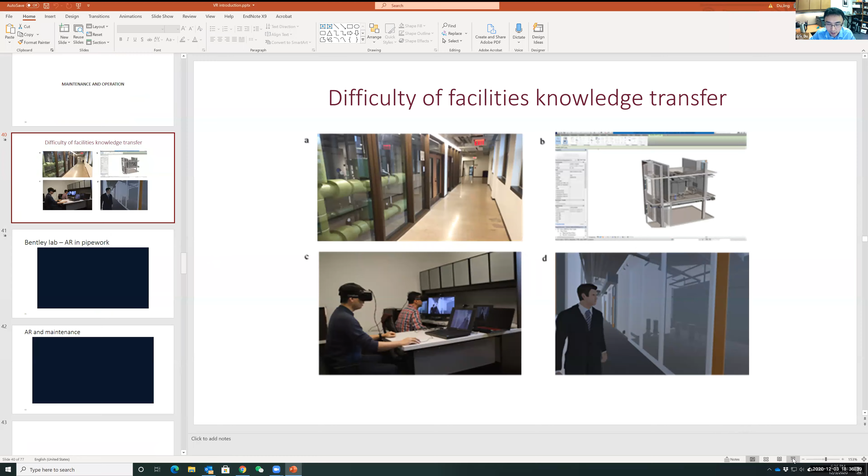Facility management is another promising use of VR and especially AR. I'm going to play a quick video by Bentley about a project they had several years ago, showing how HoloLens AR goggles can help identify issues with a pipeline system and fix the problem. You will see multiple functions in this project.

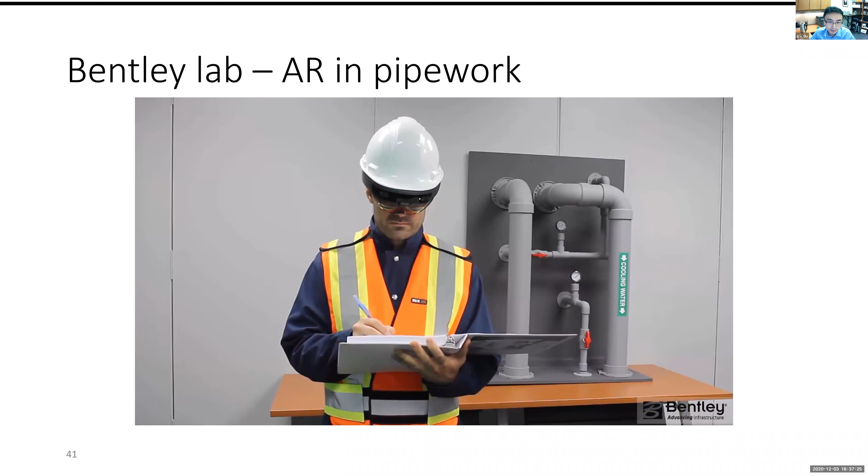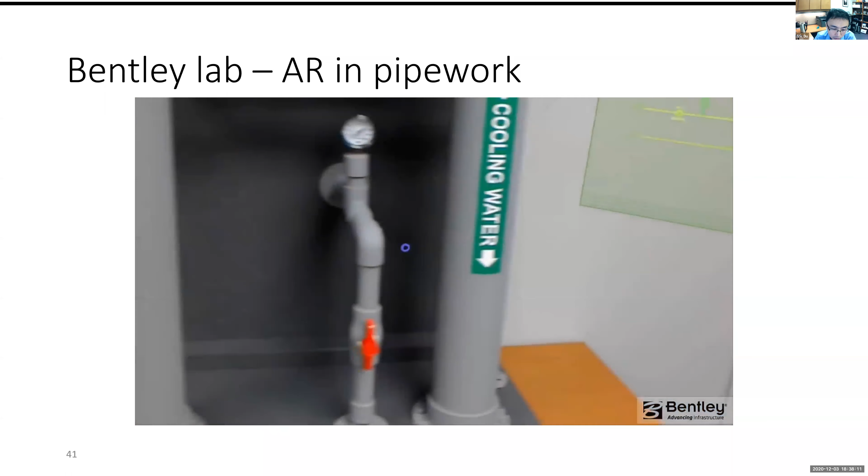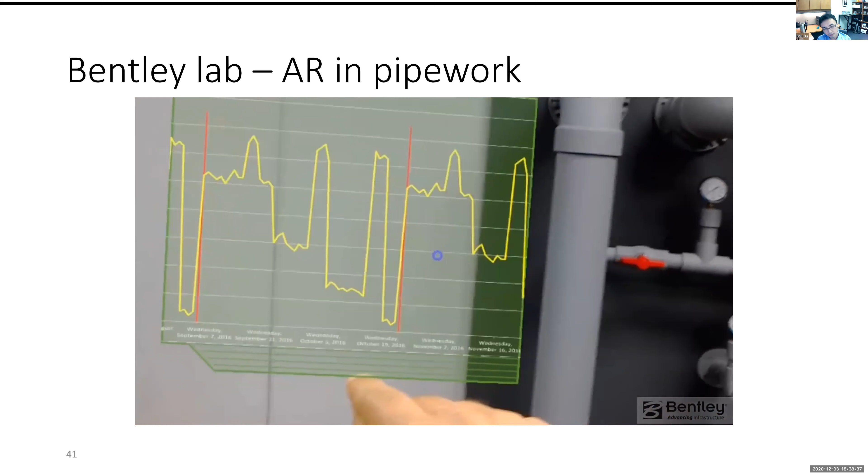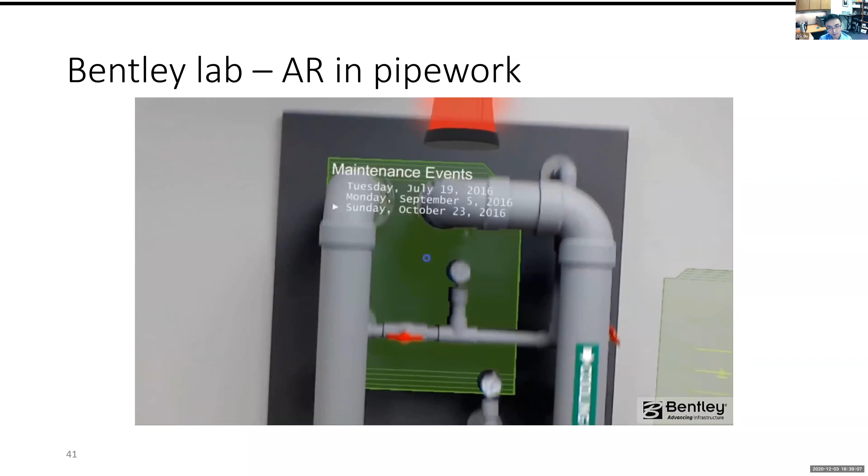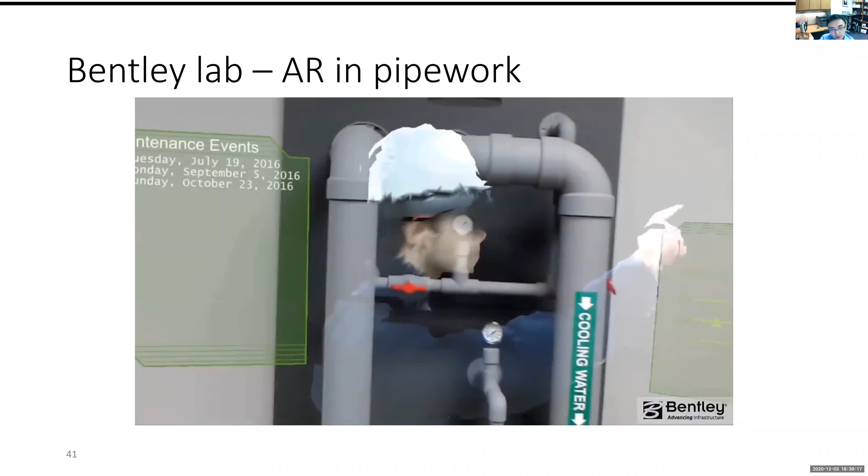So what you're seeing here is more than a video. This is actually a 3D model of a person, which means if you walk around and turn around, you actually see a 3D virtual person standing in front of you. This was also recorded by this HoloLens goggle, which has something called a depth camera. Remember we talked about scanning, LiDAR scanning, depth camera scanning, and photogrammetry - this is the second method. It's a camera that can tell you depth information and create a point cloud model of a person. So this is the application of that in AR.

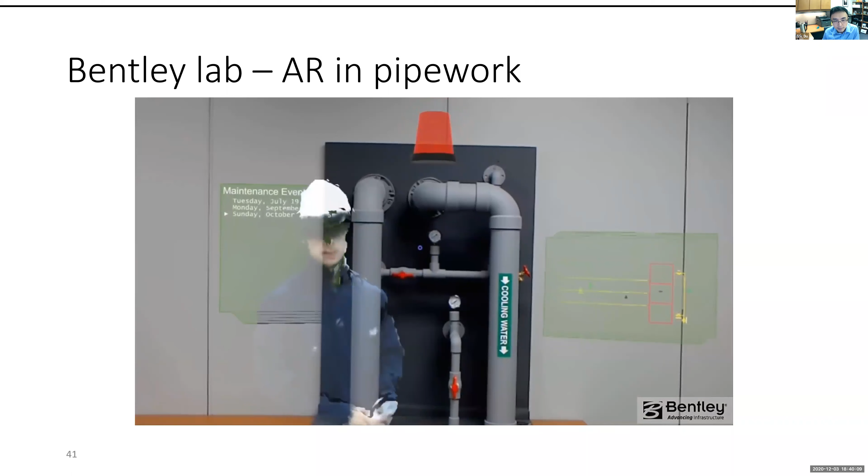Hi, I'm Ben O'Connor, and it's October 23rd, 2016, in the afternoon, actually 1:18 p.m. Today the pressure indicating transmitter 5003 stopped working properly. Measured pressure was way too low, so I replaced it. But we did the same thing last month and back in July, so that means we replaced it three times in four months. That's way too much for this type of device because they usually last more than a year. It indicates there's probably something wrong with the system, but we would need further investigation to confirm that. See my report for additional details.

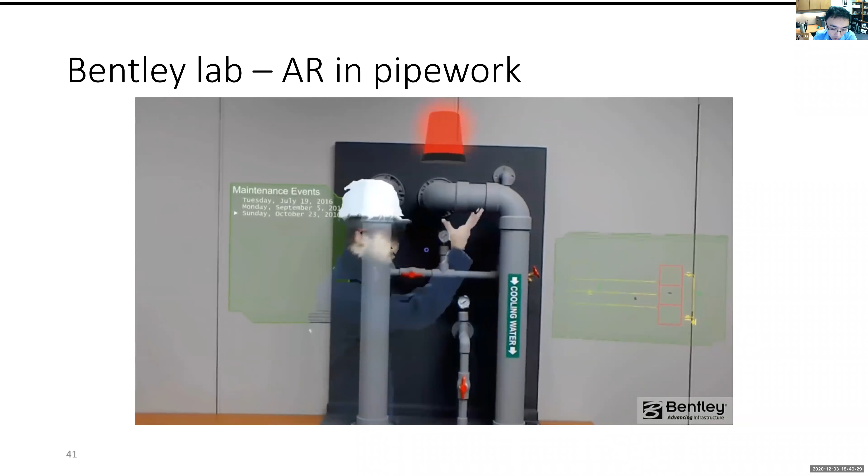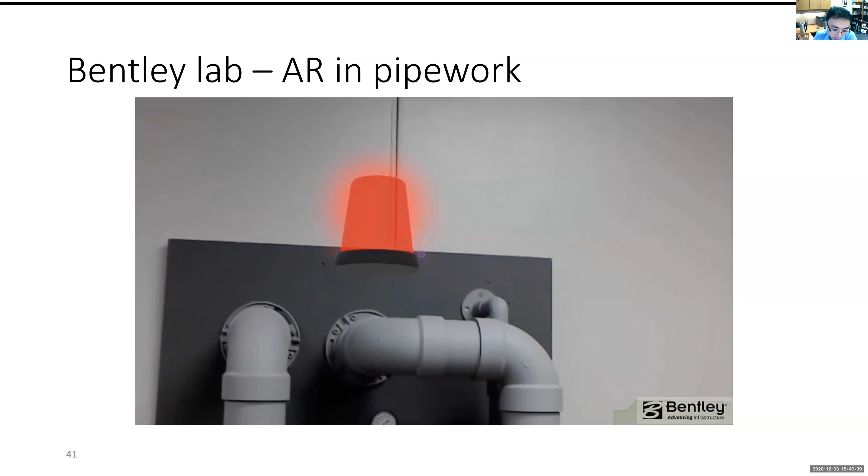Hide. So the problem keeps repeating, we'll have to do something about it. Clear alarm. Since this is a heat exchanger, the instrument indicates the differential pressure between this pipe and this pipe. The instrument is broken maybe because the differential pressure gets too high between those two pipes. So a solution could be to add a bypass between those two pipes. Well, let's do that.

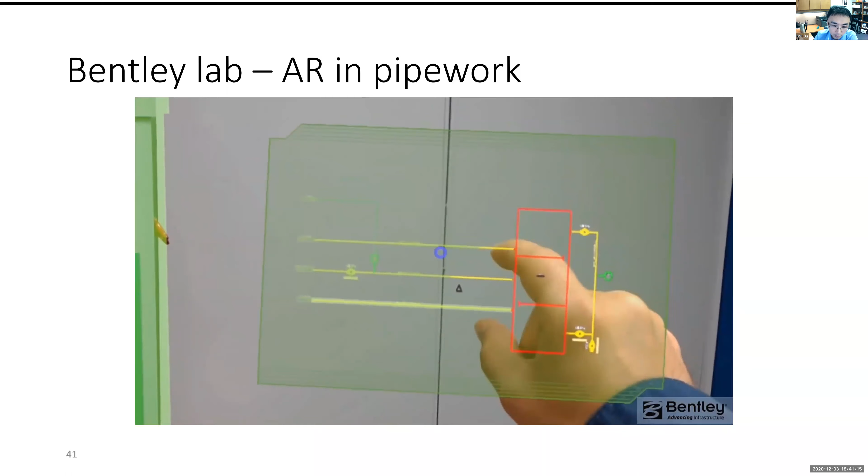Okay, those are the pipes in question. Add bypass - when you have found a suitable configuration, say accept bypass to save your design. I need to find a good configuration. Guys, here you see why VR AR is more than 2D and is better than 2D, because you have this bypass design in that schematic design. It's not enough - you still want to see if it has any potential spatial conflicts, if you have enough clearance for maintainability and accessibility. So that's why VR AR plays a much better role.

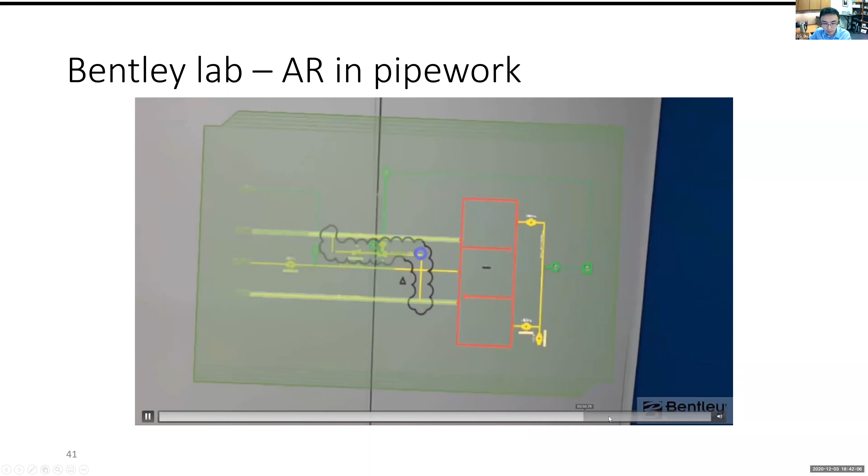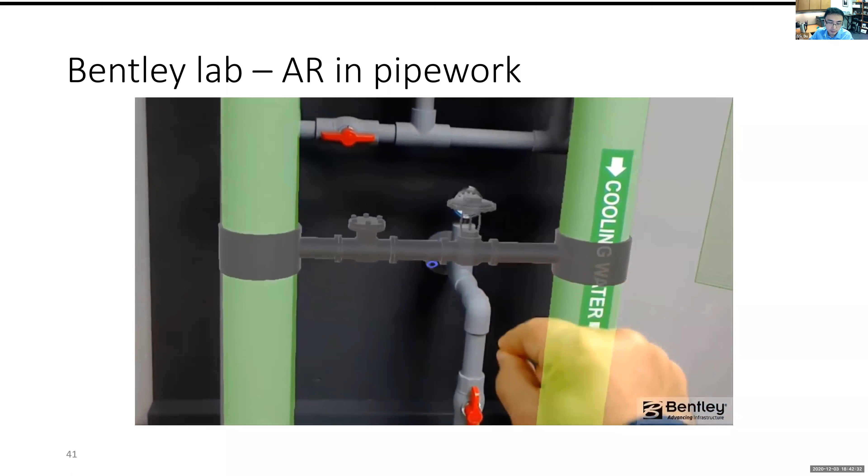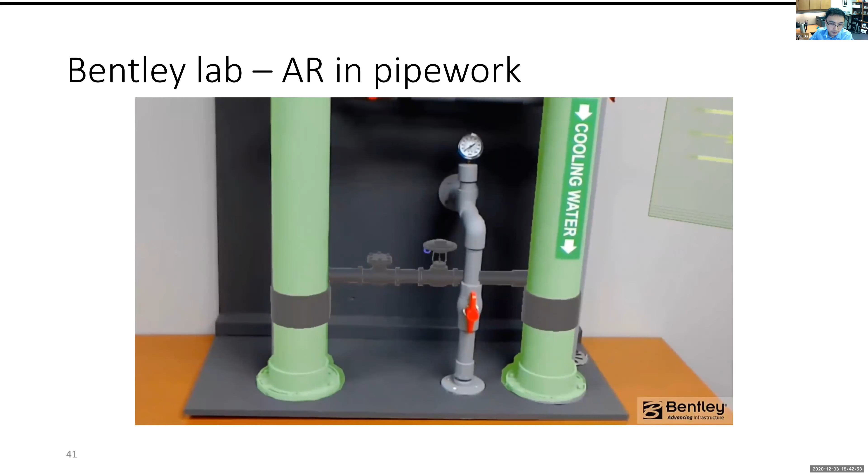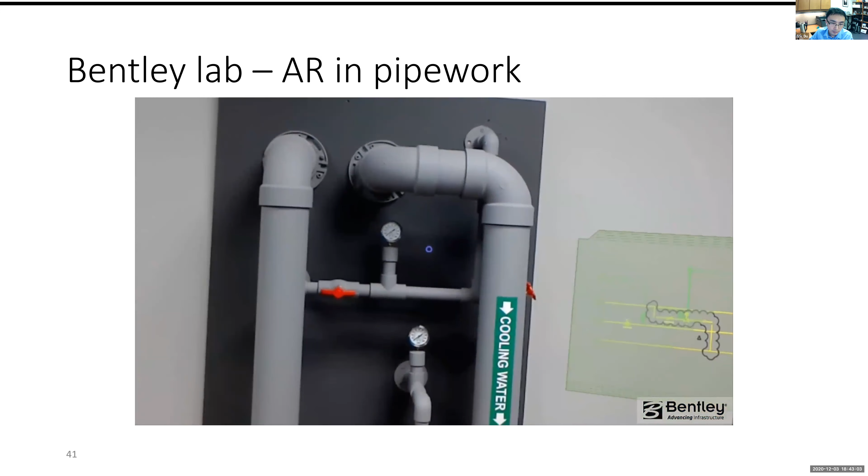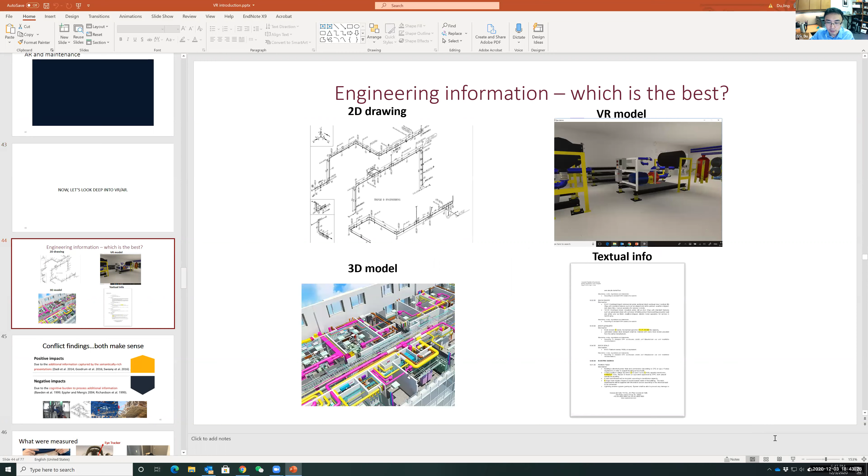So we talked about VR AR applications for design, construction, maintenance, pretty much all the phases. You can probably see the obvious benefits of VR AR, but here's an in-depth question: are they always better? Think about that - like I mentioned earlier, the evolution of our industry is actually the evolution of information. So we are moving from 2D drawings, specs, text information, to 3D models, to VR. So guys, do you think VR will benefit our industry? Is that guaranteed?

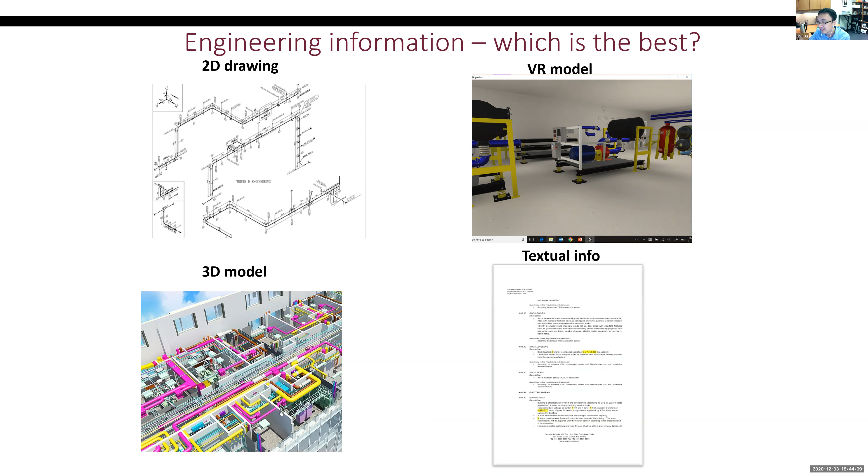So this is the question people are asking. Looks like VR looks as a better solution. They studied and did a survey giving construction workers VR versus traditional 2D drawings or other information technology to check their performance. What happened? We see conflicting findings. Some literature shows that yes, the use of VR and AR can improve the performance of construction. But some people found the opposite. They observed no change or even worse performance in construction.

What's more interesting is they actually have the same explanation. For those who supported that VR can benefit our industry, they say it's all because VR and AR can provide additional information. Instead of staring at a 2D drawing, with VR you actually have information about 3D spatial coordination, and you can look around, walk around. That's additional spatial information, so that must help with the understanding of the project.

But also, people found that VR will hurt the performance. They also argue it's all because VR and AR provided more information, so more information means additional burden for the construction workers to process. Different observations, same explanation. That's very interesting, and it made us, my research team, investigate what actually happened.

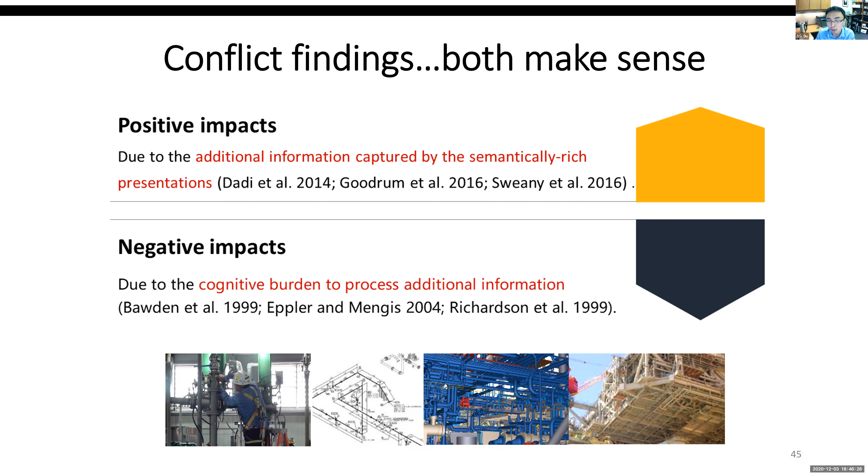And since different areas of our brain are responsible for different functions, by checking the oxygen and carbon dioxide we can somehow tell if we are overloaded by certain things. Let me show you this quickly.

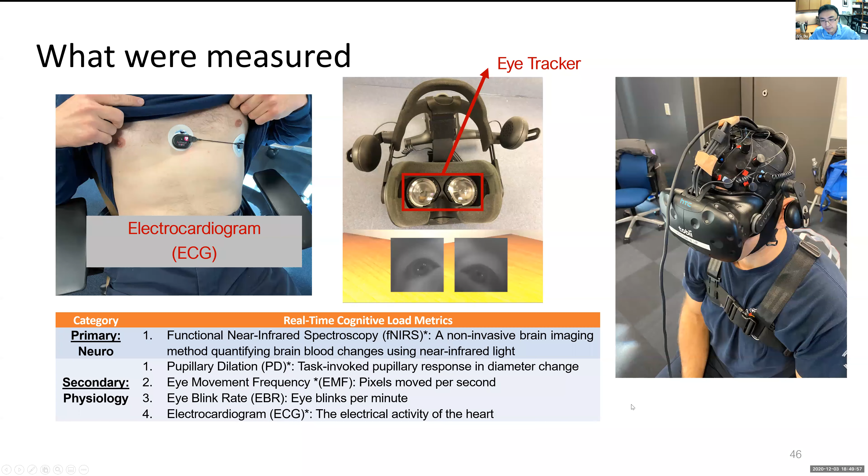So you consider the cognitive part as the parameter for this research, right? It's the measure we are measuring, yes. But it can vary from person to person, so how dependable could it be for the research? We check the baseline for each person, and we just check the pure marginal increase from that.

This is a video showing how this program and device checks things. You see this is the pupillary size change, and it also checks eye focus—where you are looking—and the blinks of your eyeball.

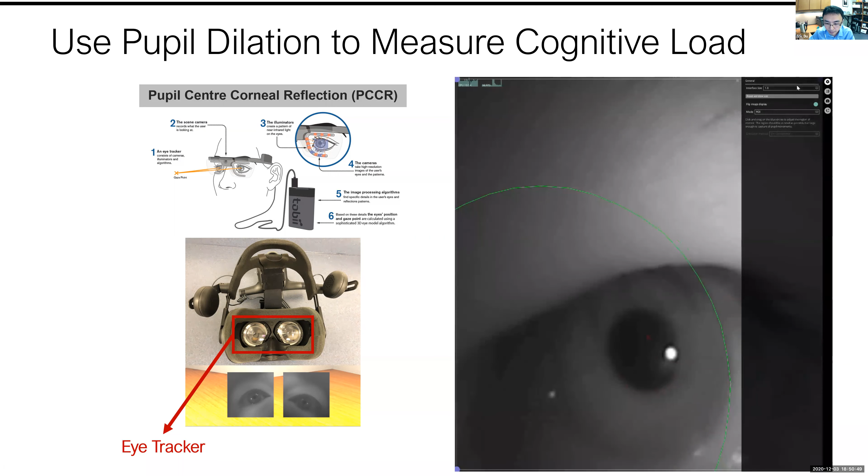We also found the pupil size can be affected by light—if it's too bright, your pupil will shrink. But we want to focus on the pupillary change purely driven by cognitive load. So how can we do it? We have this innovative way: we calculate the RGB value of each pixel, which can be translated into luminance, then use a mathematical function to remove the light response from your pupil size data. The residual is the pupil size change purely driven by cognitive load.

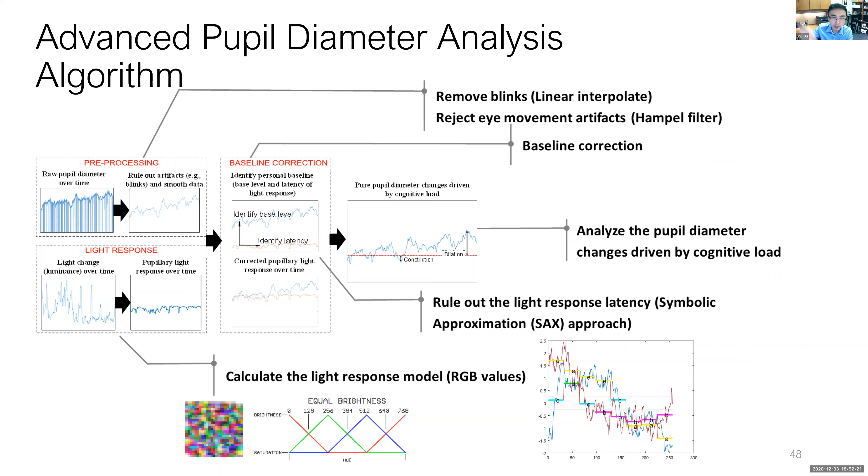Why do we need this complex mathematical function? Because there's also a latency driven by light change—for example, if I turn off the light in this room, my pupil becomes larger, but it can take from 500 milliseconds to 2 seconds to change size, and that's different person to person. Also, drinking too much coffee, lack of sleep, or different moods will change that latency. So we use a mathematical method to tell when the light condition changes and when we see a significant change in light response—we move the two curves, find the matching point, and remove the light response from the data. It's not an easy task, but we did it.

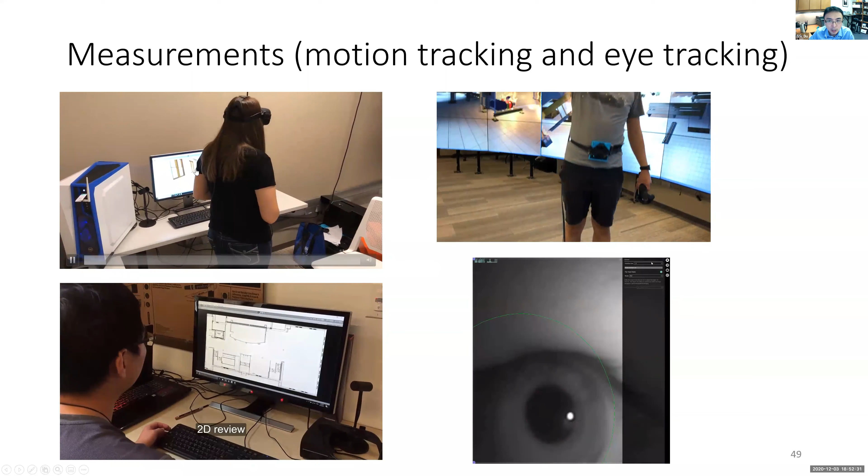Then we did the experiment. We gave people 2D drawings, 3D models, and VR. We tracked their eye focus, their motion, and their brain activity, and wanted to see how using different information changed their performance.

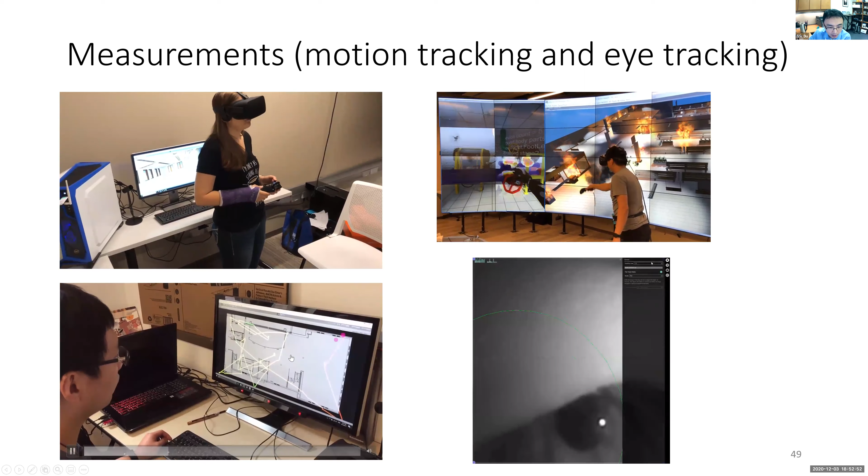For example, this is eye tracking—it tracks us looking at the 2D drawing, and also looking at the 3D model, like a Revit model. Let me stop this one. This also tracks the 3D trajectory of your gaze focus.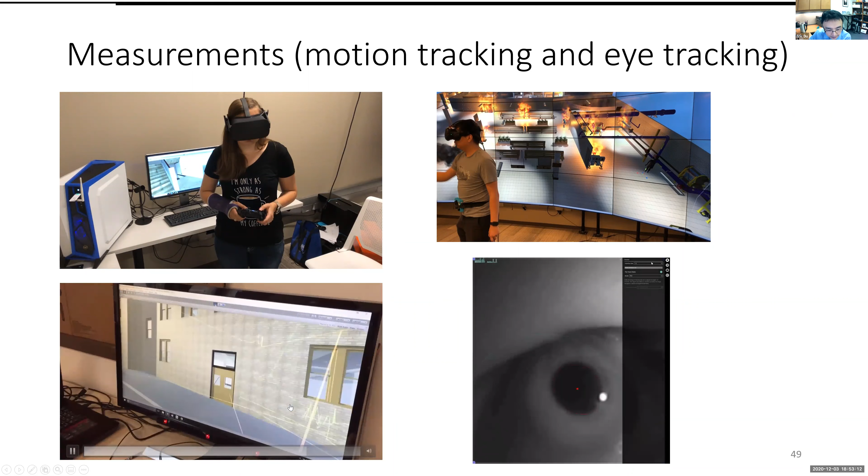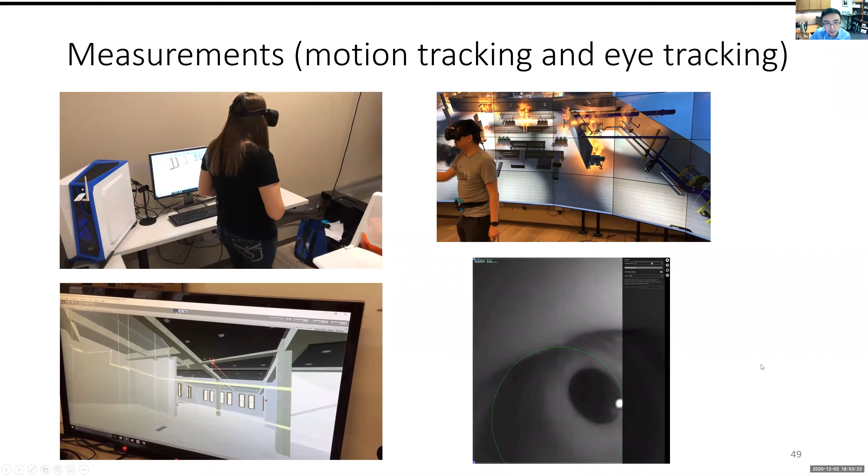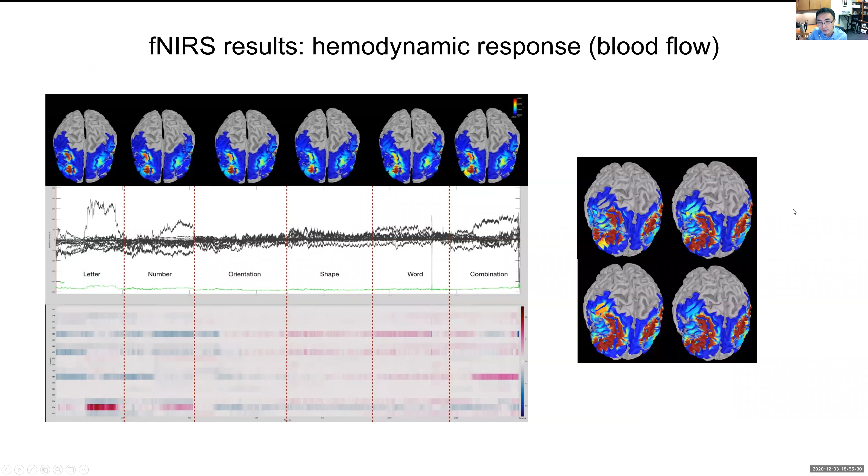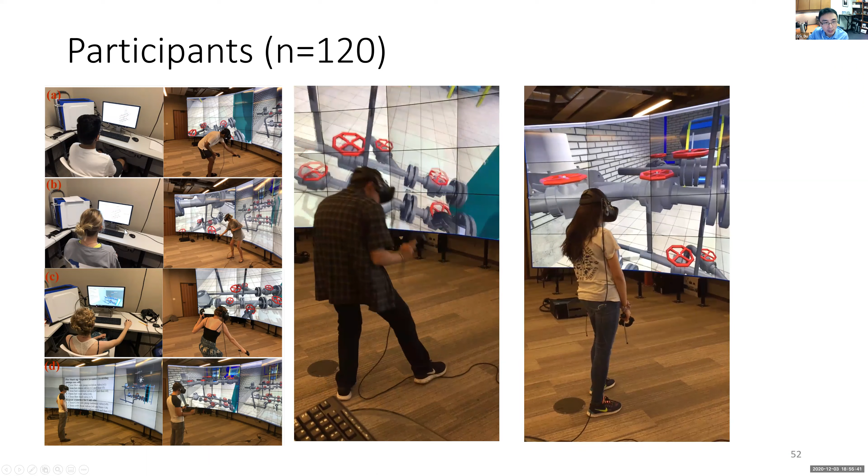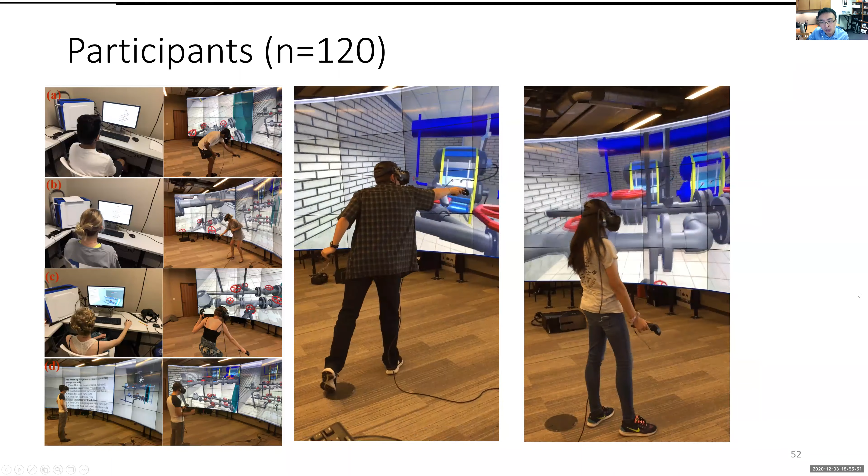Okay, so then we actually did an experiment. We give people 2D drawing, textual instruction, 3D model, VR, and we ask them to finish this pipe maintenance task while we're monitoring all their personal data. And you can see, people have different performance. Somebody performed really fast, somebody it took them longer, and they have to think longer.

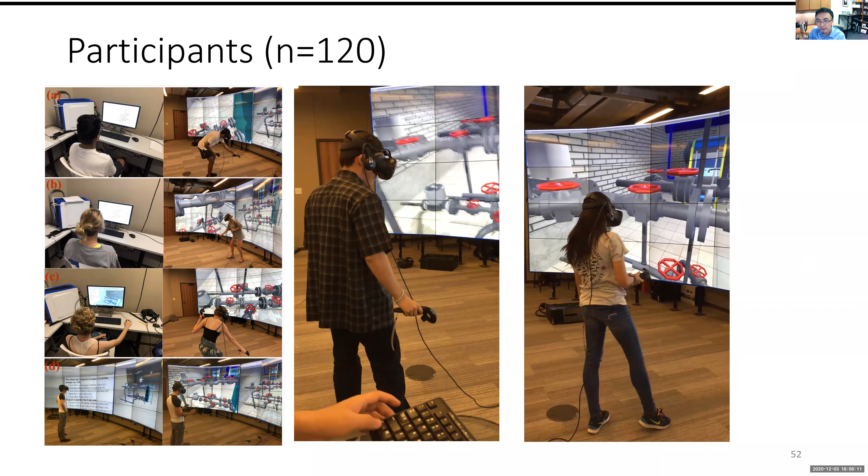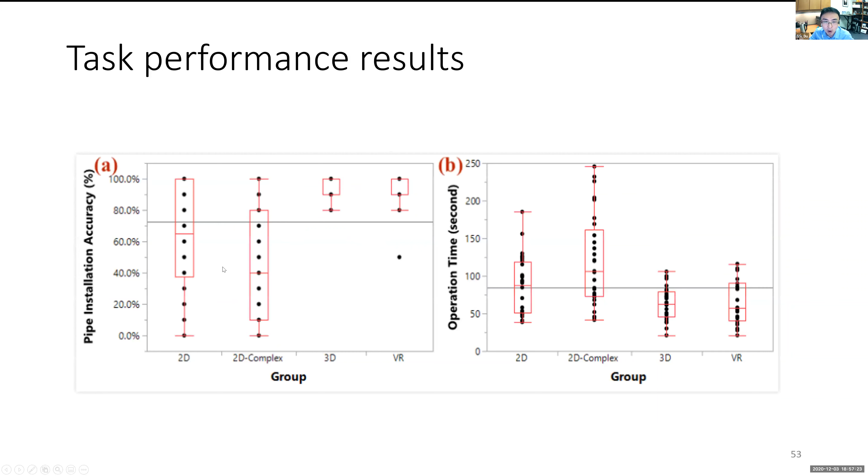So then that's an interesting question. You were actually feeling more difficulty using 3D and VR to get your performance, but your final performance was better. So what happened here?

Then we figured out the information actually plays two roles. One is when you are trying to memorize the information, you are digesting the information, like holding a 2D drawing, trying to understand what's going on here. That's called information encoding - you are writing information into your brain. But when you are working, you are actually trying to read information, kind of like reading the information from your brain. So we start to think, maybe 3D VR can benefit your performance because in the operation phase, when you are trying to retrieve information, you are trying to read information from your brain, and it made it easier.

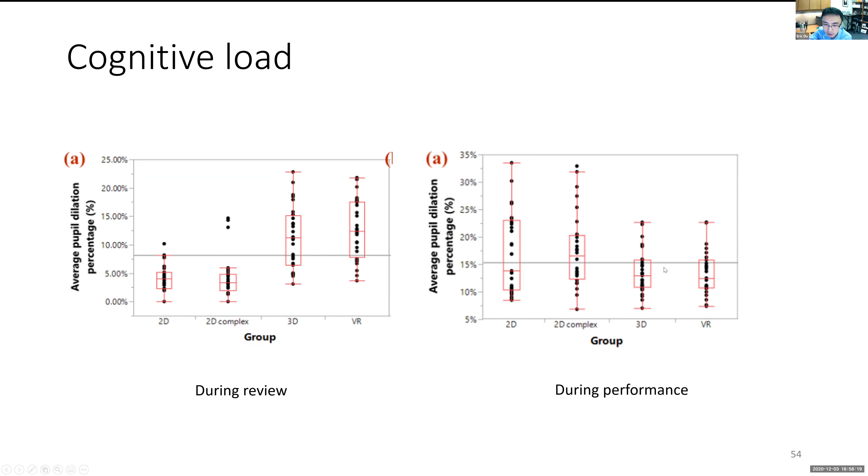And the answer is correct. So during review, 3D and VR increased the cognitive load, but during performance, they actually decreased the cognitive load. So we start to think of this as the input process, operation input process, output process.

So we gave information in 2D, in 3D, in VR to a person. Then you need to write them into your brain, hold them for a while, and when you have to use them, you need to read them. 3D and VR actually made the reading - the writing part, the encoding part - more difficult. But it made this one, the reading part, easier. And there's a conversion ratio: the cognitive load in this phase divided by the cognitive load in that phase.

We checked the ratio for each group and we found, yes, 3D VR shows a more efficient way of converting information from encoding to recalling that information. What does that mean, guys? That means 3D and VR will make the learning, will make the training, will make the writing more difficult. But whenever after that, when you put the construction workers to work, they feel it's much easier. That actually answers why literature tend to give conflicting results.

It made the learning difficult, but it makes the work easier. You guys understand that? So when you give a 3D model or VR to a person, yes, they have to digest more information - there's an information overloading, there's a cognitive overloading. But because of that, because the VR simulates a world, simulates an environment that is so similar to the actual work environment, when you are working, you feel so familiar and you feel more comfortable doing things.

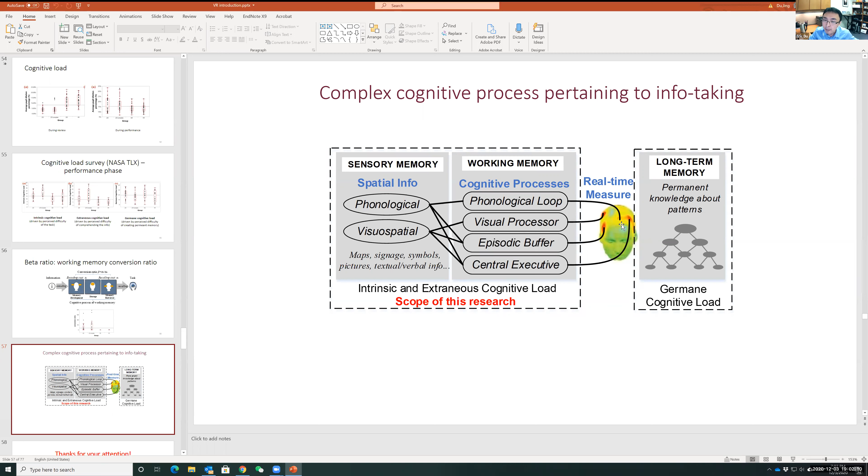We found the picture, the story is even more complex. Depending on the type of information—phonological information such as words, numbers, symbols, or visual spatial information such as colors, lines—they're actually triggering very different processes in our brain and different areas in our brain. So my research team is actually researching how VR AR can manipulate this process and make better use of your brain. That's a quick view of VR AR.

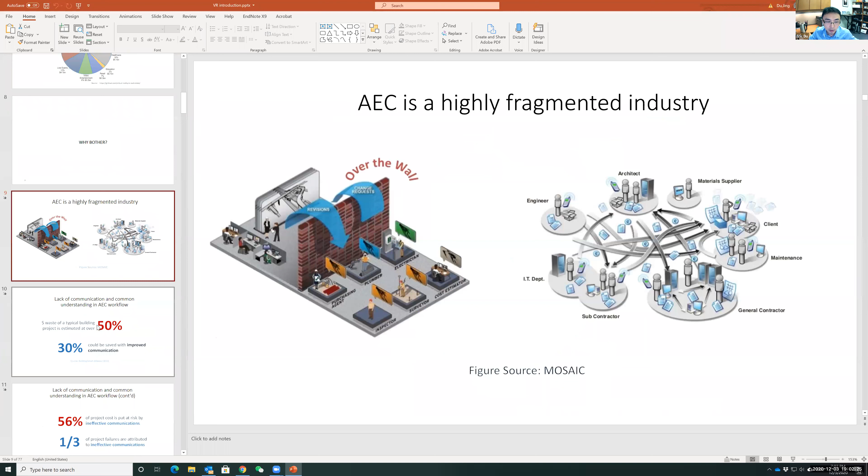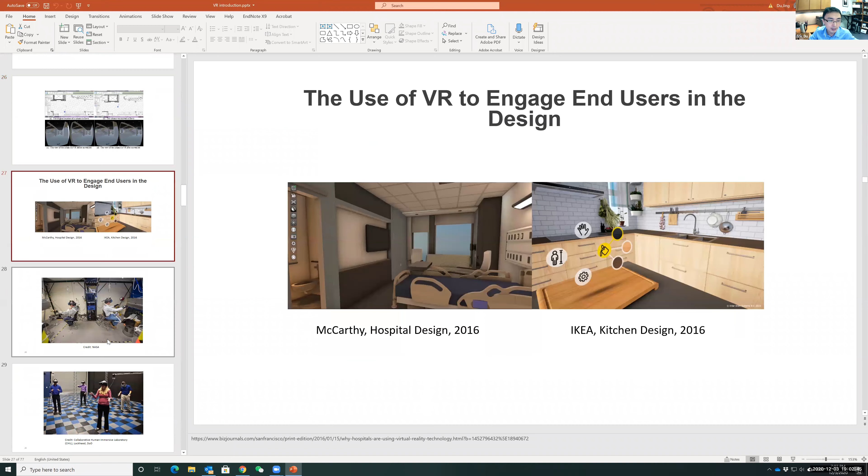To recap quickly, VR AR is becoming more and more popular in our industry, because we figured out that a lot of problems in our industry is the lack of communication. VR AR is a natural, intuitive way to communicate complex information. That's why we start to see a lot of applications in design, in construction, and also in facility management.

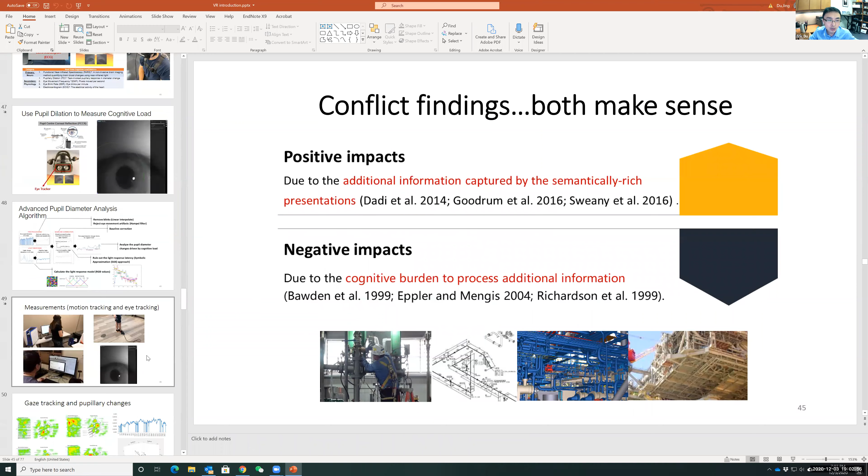But when you are talking about the sense of VR AR improving or affecting your performance, this actually is something about cognitive process. VR AR doesn't change your cognitive load at all. It's just reallocating the load to the front end, which is a more desired scenario in our operation. Okay, so that would conclude our talk.

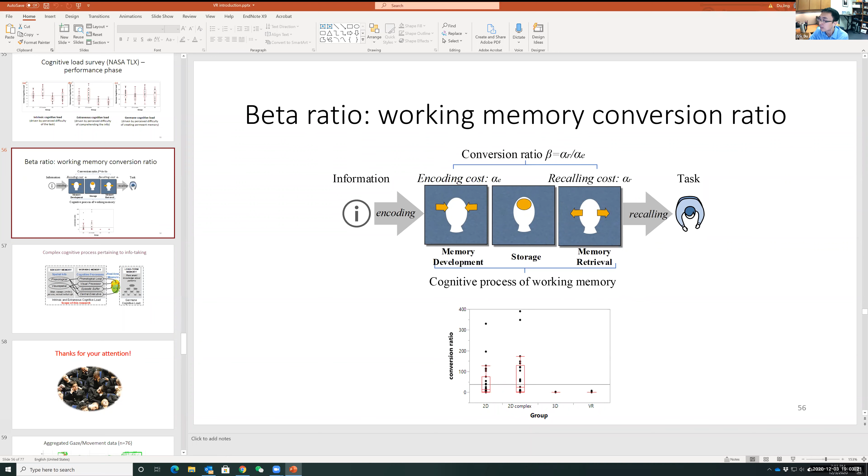I just wanted to share—I saw an article in the MIT Technology Review magazine, I think it was last month. It's kind of related to this because there's a startup in Israel that's putting cameras in workers' helmets, and basically it's running artificial intelligence software, spotting in real time mistakes and errors in the construction, and throwing alerts for engineers or managers that this is happening in this zone. So it's kind of a mixture—it's not virtual reality or anything like that, but it's throwing artificial intelligence, because it's comparing it to the digital model. I just wanted to share that, I thought it was really interesting.

Yeah, thank you for sharing. In general, this is about human-computer interaction. I guess the true benefit of VR AR is it provides another intuitive way for us to interact with automation systems. Imagine when we start to have a computer, the only way for us to interact with it is to code lines of data, right? So we have to use the keyboard to put in lines of data. Then we have this invention, mouse—it's easier for us to interact with computer. Then we have voice control. Then we have 3D models. And nowadays we have VR. It's just yet another way to interact with machines. The one you mentioned, reported by MIT Tech Review, I think it's the same thing—just a more intuitive way of interacting with machines. And yes, that will be coming. Thank you for sharing.